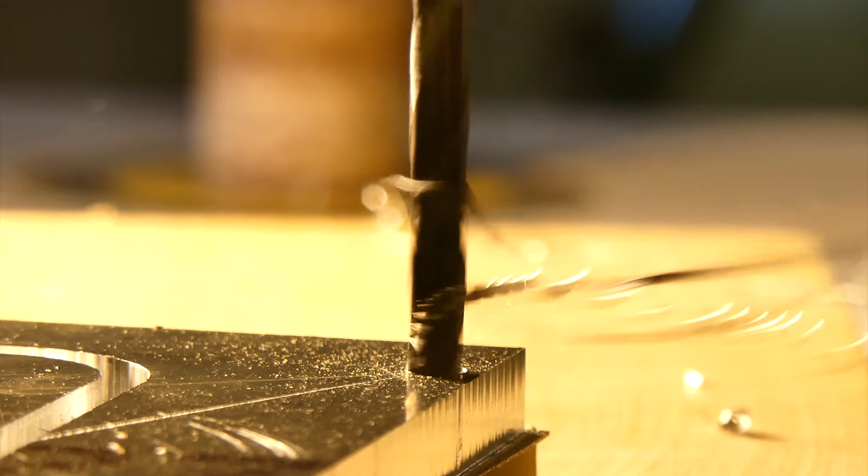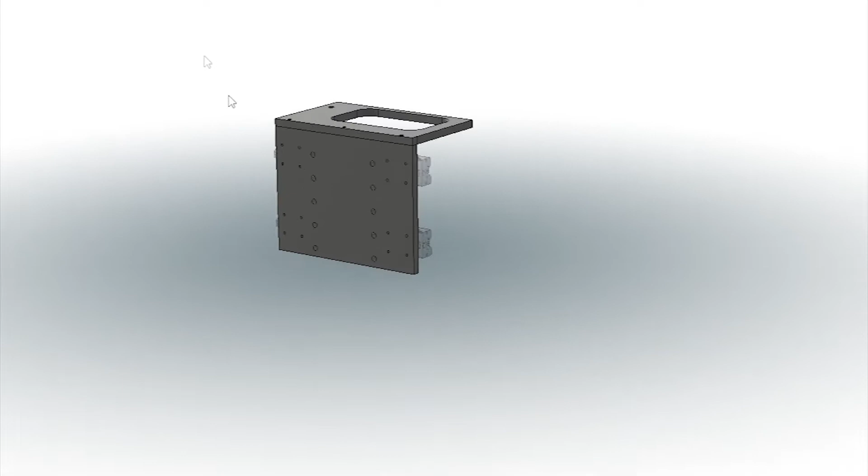The question really comes down to how much effort you're willing to put in to get what you want. Or do you believe that the effort you're putting in now deserves those results? What if I told you the effort is what it's all about, not the results? The path, not the destination.

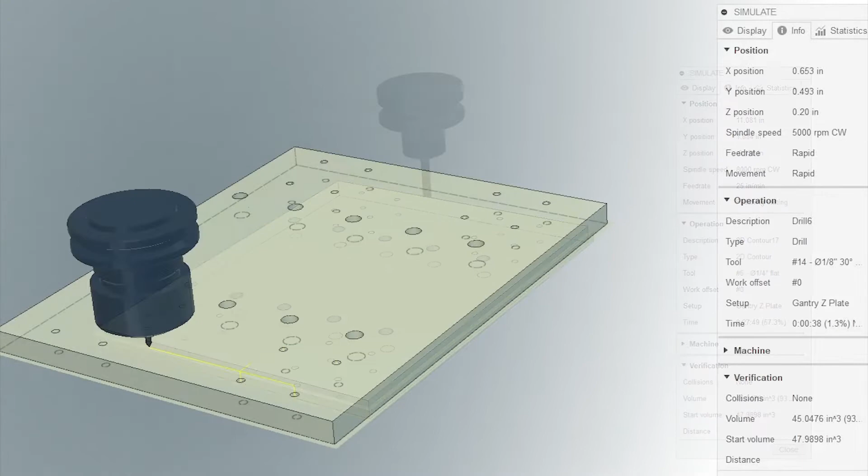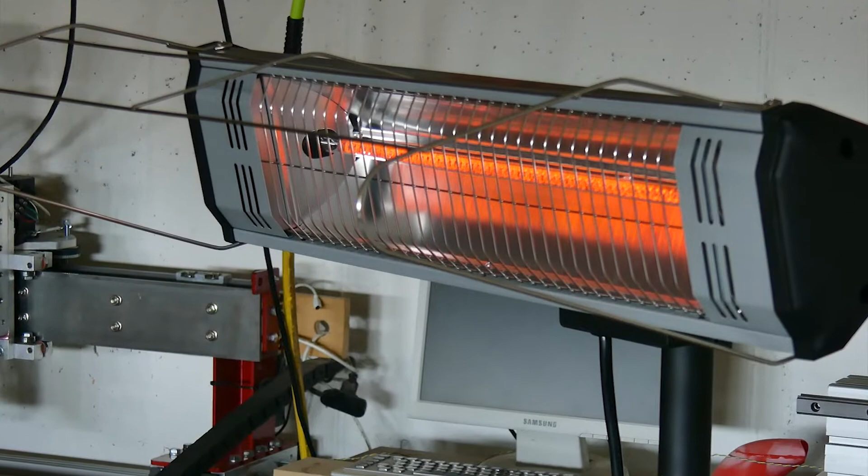This kind of thinking is how to find long-term happiness. If you're saying to yourself, and why wouldn't you be, what could he possibly know about the meaning of life and a path to long-term happiness? And even more to the point, what does this have to do with building a CNC router? All of those questions are valid. I will say to you, my fictional counterpart, making things is one and the same as the pursuit of happiness. And on that, I think we can agree.

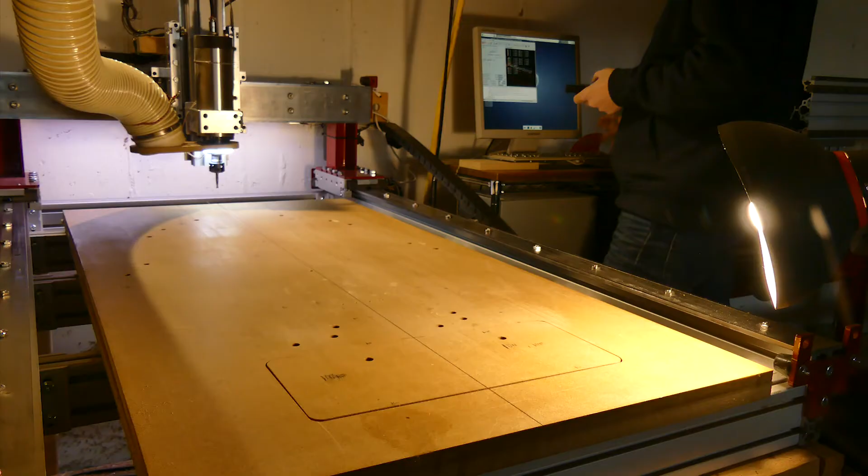For those that take delight in the abstract, the obscure, or even the thinly veiled metaphor.

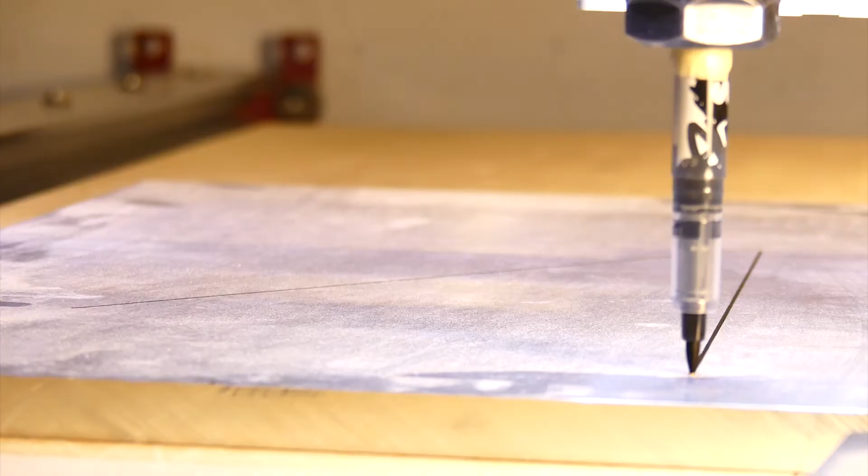Now that I seem to be making the transition into an actual old guy, my OS is beginning to follow suit. I've always wanted to be a Linux guy. I just wasn't old enough to pull it off. I think the time has finally come.

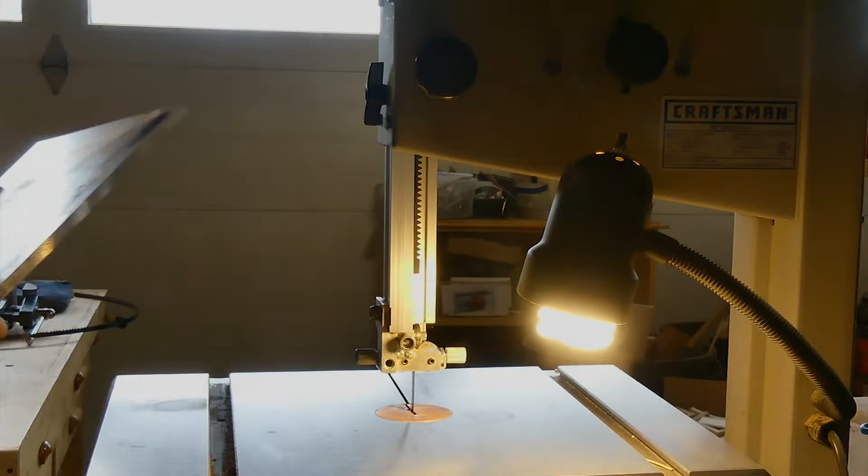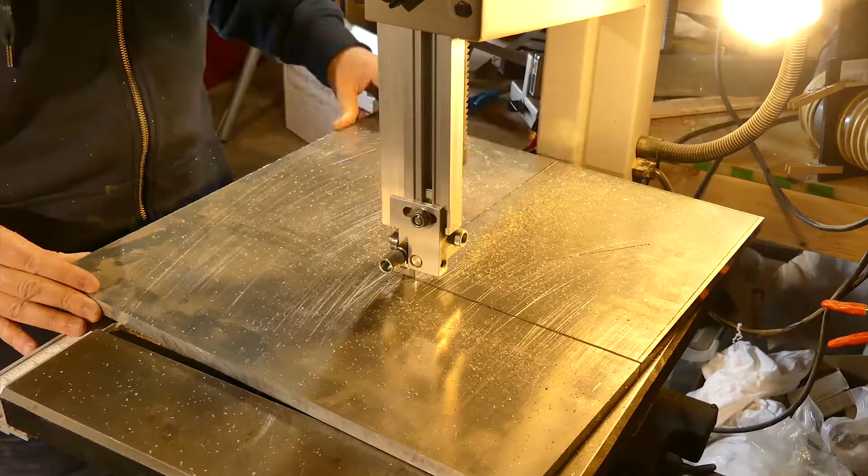Even though my process may seem dialed in, a groove so deep you might call it a rut, it's not in my nature to take a low road, the easy path, or the simple solution. I'm going to make this intentionally a bit more difficult, but in a way that paves what I think is an interesting path into the future. You can call me crazy or kooky or even late for dinner if you like, but this seems like the right choice.

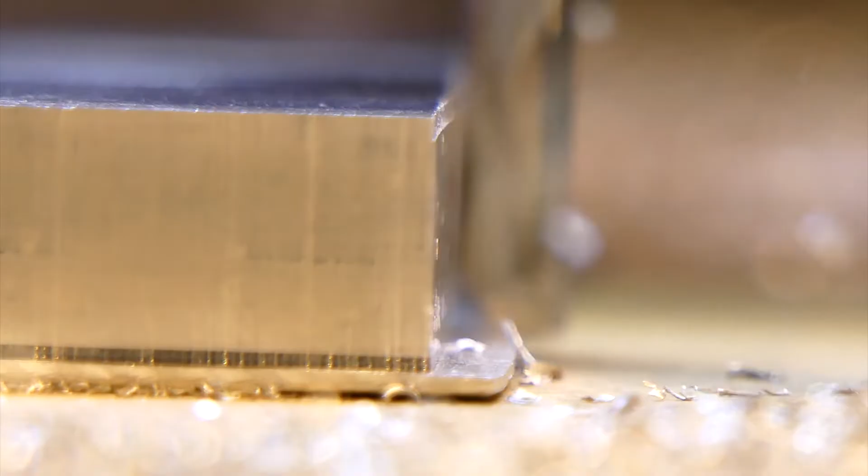There are only a few more parts to make on this machine before it's time to get to the real fun stuff, well, at least for me. Many people, I hear, dread wiring work. If you can accept that everybody makes mistakes, and I mean everybody, and yes, at times those mistakes can cost you some parts, then it may not be as painful as you first envisioned.

Unfortunately, this is part of the process. As you accept this fate, you learn the creativity and satisfaction that come along with what this task has to offer. But let's not get too far ahead of ourselves just yet.

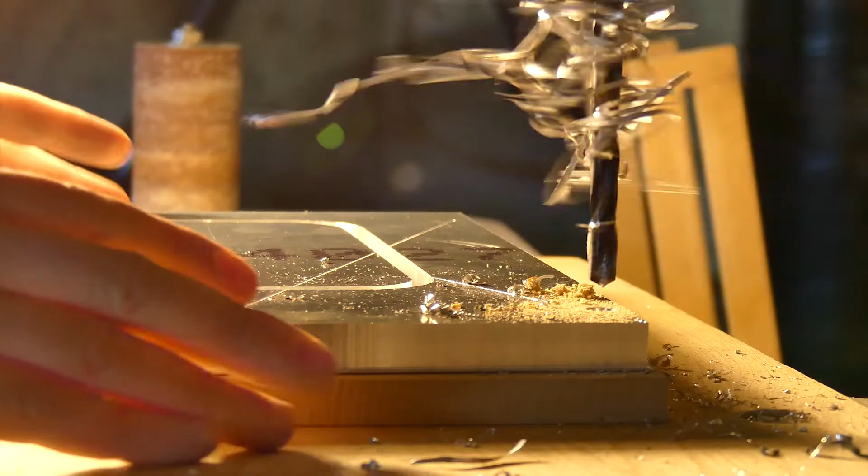If you haven't noticed, and not that it would be obvious, unless I've made it so, I've been slowly transitioning to working through Linux CNC rather than Mach 3. It wasn't that long ago that I said I would eventually be converting my shop machines to Mach 4. As I thought about this, I decided to do a little more investigating into the options out there. And since I already had Linux CNC set up on my machine, it made sense to put it through the paces and give it the old college try.

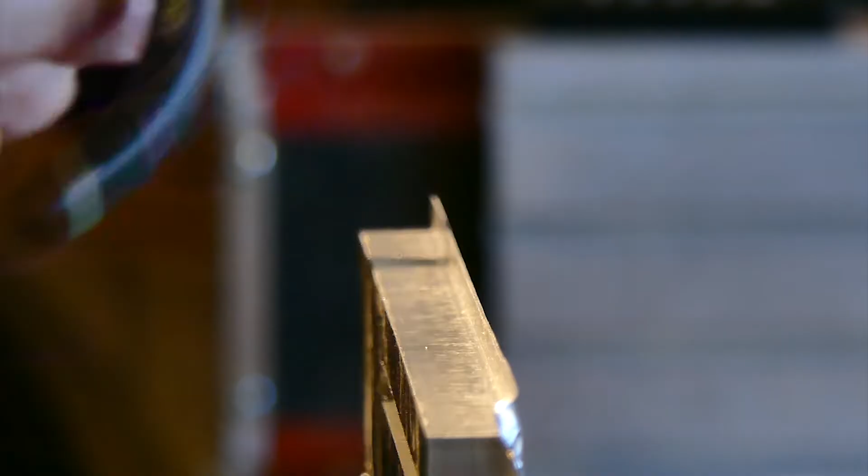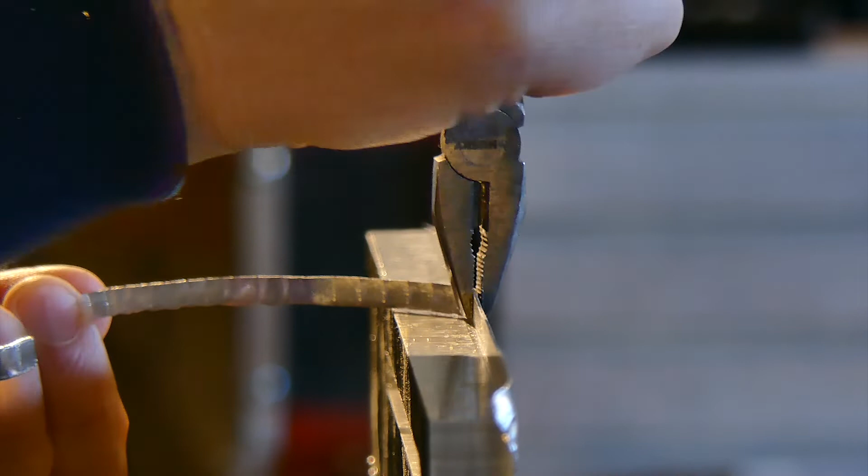When I learned that PathPilot, the software that runs Tormach machines, was essentially a proprietary fork and custom UI of Linux CNC, and that many other industrial machines use the solution, it definitely raised an eyebrow. This is probably not for you if you just want to plug the thing in and get going. The Python development skills I've been working on through the last year make this an interesting avenue of exploration. I'm not sold yet, but I'm definitely having a good time learning a bit more about it each day.

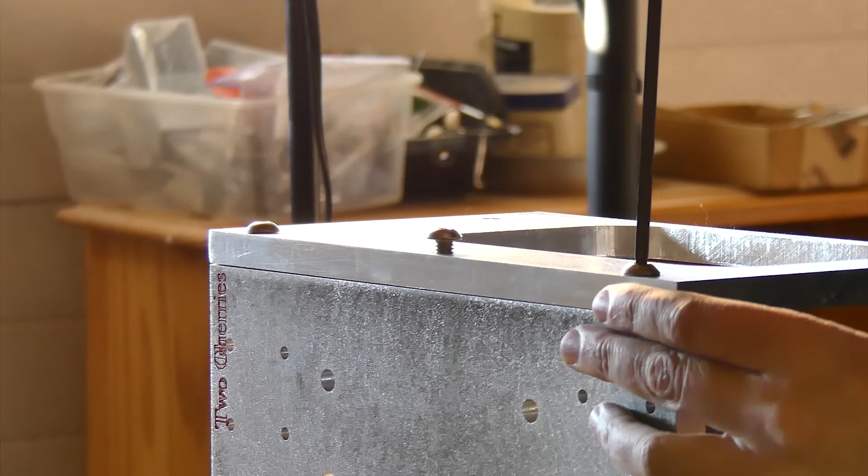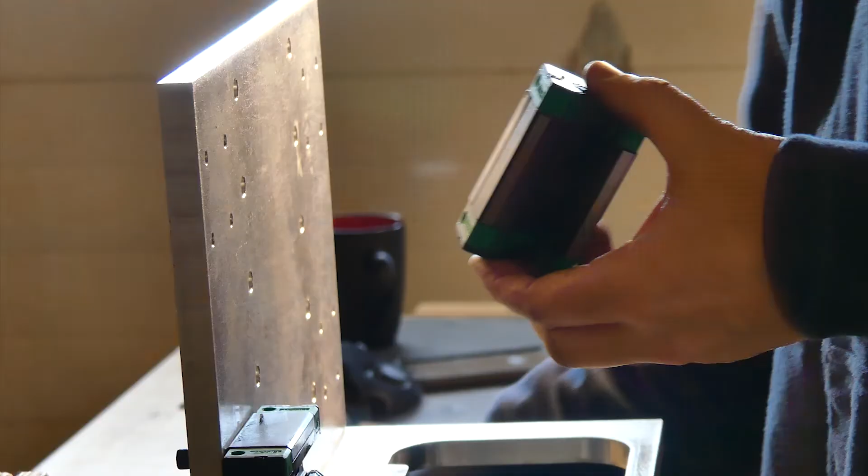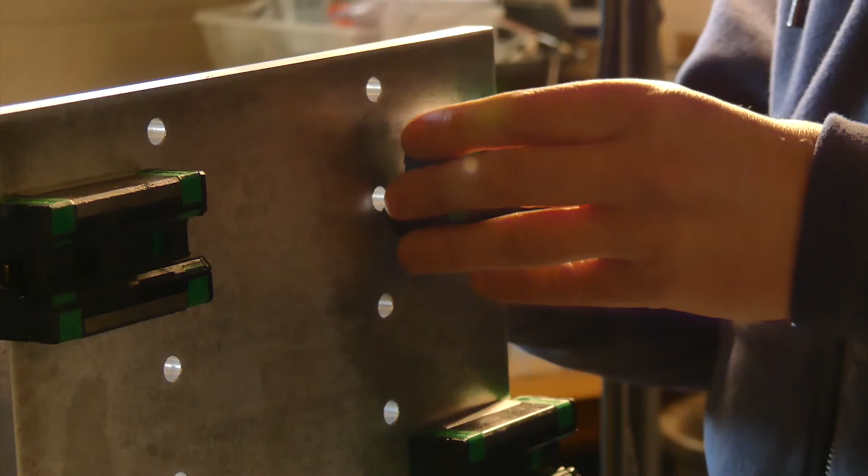In the next video, I'll be installing the stepper motors and going into the deep end of what I've chosen for electronics, and quite possibly, if I get the time to clean it up a bit, the details of how much this thing cost me. I still have a few bits and pieces to order, and I'm not ready to pull the trigger until I have a few more details about what I will need to finish this thing up.